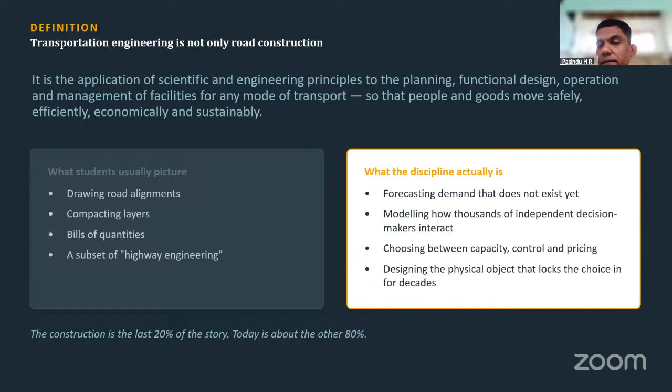A common misconception among civil engineering students is that transport engineering is confined to road construction, which is not the case. It is only a part of transport engineering. Under highway engineering, you do road construction, and that comprises a major component of the domain, but it is not the only component. That's a common misconception - when people ask what you're doing in transportation engineering, they assume it's just road construction, road building. But you'll realize it's much broader than that, covering more vast areas of disciplines.

So before we go into career paths, let's understand this transport system and how these three components interact: fixed facilities, flow entities, and control systems. The fixed facilities are the infrastructure we see - roads, junctions, bridges, footpaths, bus terminals, airports, ports - all those are fixed facilities. That's where infrastructure engineering or civil engineering input has the greatest impact on designing, constructing, and managing these fixed facilities. Then on these fixed facilities, you have flow entities, which are the moving component.

Now, for example, on a road you will see vehicles. In an airport, you will see aircrafts. On a pedestrian walkway or a footpath, you will see people. That is the moving entity, we call it the flow entity, the units that move through the fixed facilities.

The last, but perhaps the most important component is - when you have these moving components on fixed facilities, there has to be some rules, right? There has to be some control over it. Otherwise you will have a lot of issues. First of all, you have safety issues, there'll be accidents and other hazards. Also, if you don't have a rule-based system, the system will not operate in an efficient manner. That is where the signals, traffic signs, your bus schedules and timings, aircraft control systems, port navigation systems, all of those come into the picture to ensure these flow entities use the fixed facilities primarily in a safe and efficient manner.

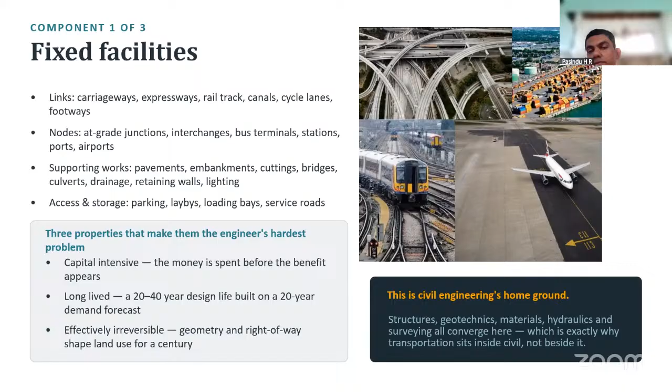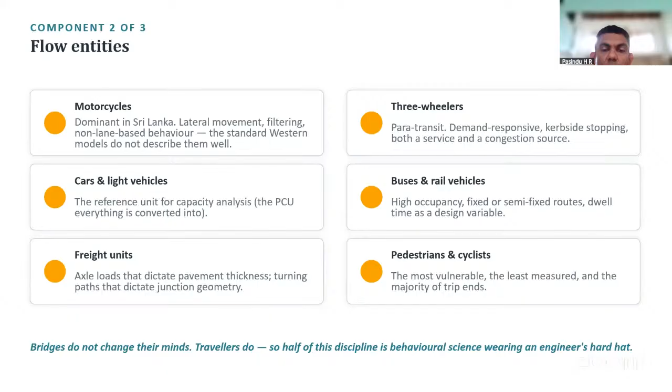Flow entities, I don't need to explain too much. All types of movement, whether it's a ship or a plane or a bicycle, you're walking, anything, your goods, freight - everything is part of this broader definition of flow entities. So you can have flow entities on guided tracks, and you can have flow entities that move freely.

Now, people inside the terminal, that's a flow entity. So if a civil engineer is designing a terminal, our primary demand is from these people movement. So we had to figure out where these people are coming, how many people, how will they concentrate, what is the speed at which they will move. How much time they need to board, how much time they need to alight, how long does it take to issue a ticket. All these are parameters that we'll take into account in designing the size of this terminal. It doesn't come - it's not this random thing that people figure out, this is the size.

And a lot of calculations go into determining this. There are standards developed by various agencies to help you do that. But a lot of the time, you go through fundamental analysis to figure out these things, because, as I mentioned, we are designing while incorporating a lot of human behavior. So it can change, and that change will affect your entire operations.

The other thing is, how do you measure flow entity movement? We talk about a rate or a flow rate. We talk about vehicles - if it's moving on a lane, we say vehicles per hour. So on a per lane basis, you can move about 1,800 vehicles per hour if things are operating well. But when the traffic breaks down, when you call it congested or gridlock condition, this vehicle flow from 1,800 per hour goes down to about 200, 300 passenger cars per hour. That's when you call it congested - we call it traffic block.

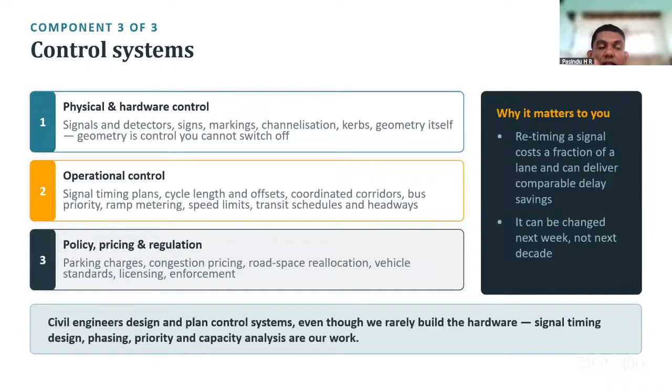Later on we'll discuss how civil engineering has a component determining this control system for various fixed facilities. So these are some examples - your traditional traffic signage, road markings.

In a railway, you have the signals. If you go to the railway station HQ, you'll see the big panel where they control all the train movements. They are managing it - the trains by themselves cannot manage the movement. So there has to be a central place where they control this - the air traffic control center.

So now we've discussed and you have a fair idea of what these three components are: fixed facilities, control systems, and flow entities. Whatever it is, you have to plan, design, build, and operate - that's the process for any engineering aspect. You plan something, you design something, and build and operate.

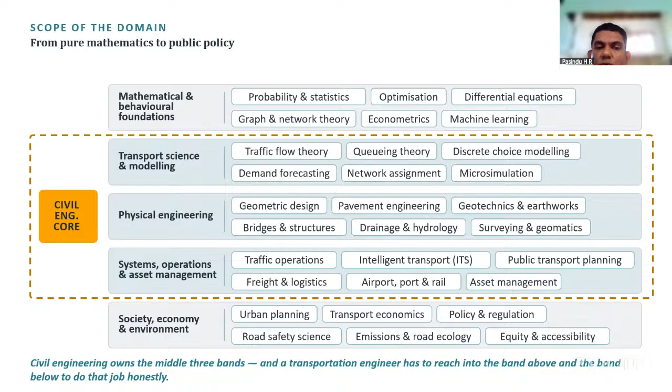Another way of looking at transportation is through its subdisciplines: planning, traffic, highway design, and pavement design, which is the soil or structural design. If you go further up, that means less involvement for civil engineering. If you go further down, that's more into the core civil domain.

In very classical universities, they won't even have transportation as a department - they'll have geotechnics or geotechnical engineering take over the pavement design component, so there's no specialized division. At least in most civil engineering programs you'll have geometric design and pavement design, but if you do electives, you'll often have planning and traffic engineering modules too.

But if you go to schools like Delft, they have a faculty of civil engineering, so within transport they cover a lot at undergraduate level, touching on social sciences, economics, and systems engineering. There's a good school in Dresden, Germany, with a massive transport engineering faculty, looking at ecology aspects as well. It all depends on the focus of the degree program - that's the main thing.

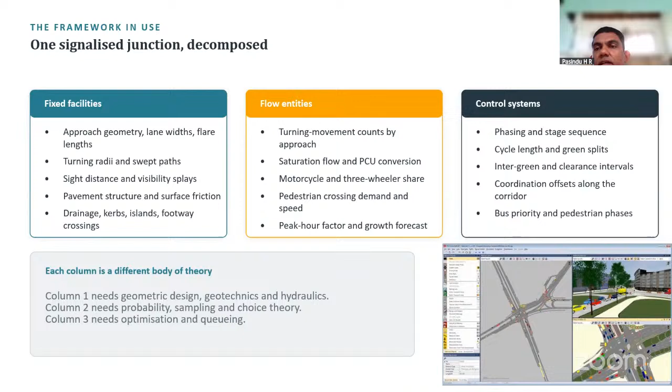If you have bus priority, you can have a separate bus lane, for example. If you remember, certain junctions in Colombo have a separate bus lane at the junction. So those are all controlling the movement of flow entities, while making sure you keep everything within the fixed facility design parameters.

So this is what I was just talking about, vehicle movement. This is a very interesting area in transportation engineering - the study of vehicle movement. It's very similar to the hydraulic pipe flow equation, where flow is estimated as the product of the area of the pipe and the velocity. It's very similar to that. Our velocity is the velocity of the vehicles, average velocity.

So traffic flow theory is rooted in this fundamental concept - a study of the movement of vehicles. From this point onwards, you can develop all kinds of complicated equations. You can do numerical modeling, develop software, and analyze it using software. But it's rooted in this fundamental concept of studying the behavior of vehicle movement and how the speed and density of the vehicle flow will change, because those are related.

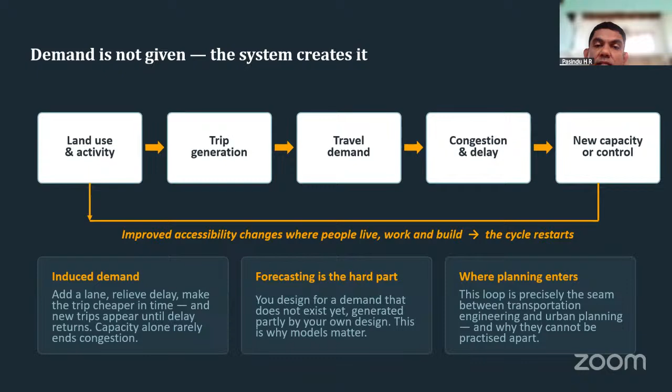Then you estimate from where to where these trips are going, and obviously they will use a particular route - that's where congestion and delay happen. That's how you have to plan, plan for new facilities. When you have delays or congested roads, you figure out whether you want to add a new road, put in traffic signals, or find some other solution. So this is another main component of transportation engineering - looking at demand, how it evolves from trip generation up to how vehicles are assigned to a particular route.

For example, when the Ratnapura Expressway was planned, you do a model for the entire study area. You find out, if we were to develop an expressway up to Ratnapura, what type of locations will it serve? Will it serve people living in Colombo, or people living further south of Colombo? Where will they try to go - will they just go to Ratnapura, or go further down towards Hambantota? All this type of modeling work can be done using transport flow analysis.

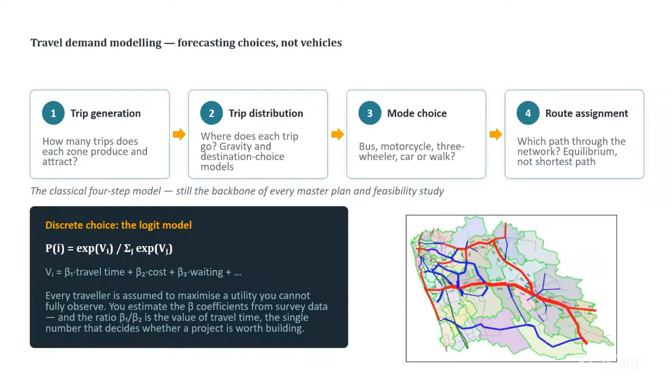So as I was continuing, you can finally end up estimating how many vehicles will be assigned to the expressway, and then you move ahead with the design stage afterwards.

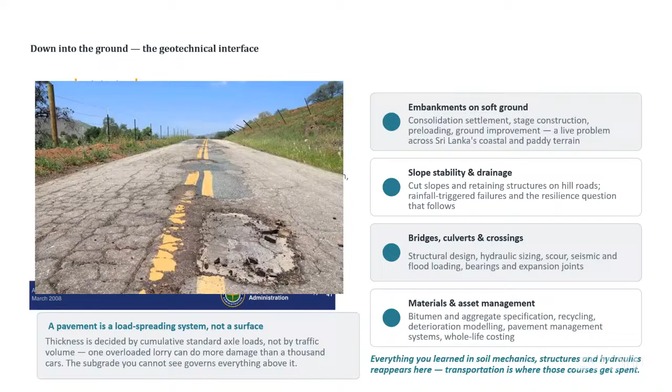So that is where the efficiency breaks down. So that's why you say we have to design a transport system in a proper manner so that it will function safely as well as efficiently.

So beyond our engineering domain, these are a few areas that transport engineers need to have some idea, some awareness, or more than that, a little bit of appreciation of the implications of that.

Road safety. A lot of our engineers have very little regard about road safety when they are designing infrastructure. So that is something they should understand: vehicle performance, what it takes for a vehicle to stop, how your infrastructure will assist that process, and the implications of that, especially the interaction between pedestrians and vehicles, who's at risk, and how do you minimize that risk.

Environment and ecology, you'll see in the news a lot of problems when you do road projects. People are protesting. Environment groups are very aggressively protesting against some of the projects. So you have to acknowledge that there's a problem, and be ready to face those as well, because ultimately it will come down to the consultants or the contractors to defend those.

Economics and appraisal, how do you justify these projects? Is it worthwhile constructing a 4-lane road? Do we need an expressway here? Should the government import these low-floor buses? So those are all economic decisions. And unfortunately, sometimes transport engineers are not that involved in that decision-making process, because we don't make ourselves aware of these components. We are just sticking to our domain, which is not enough.

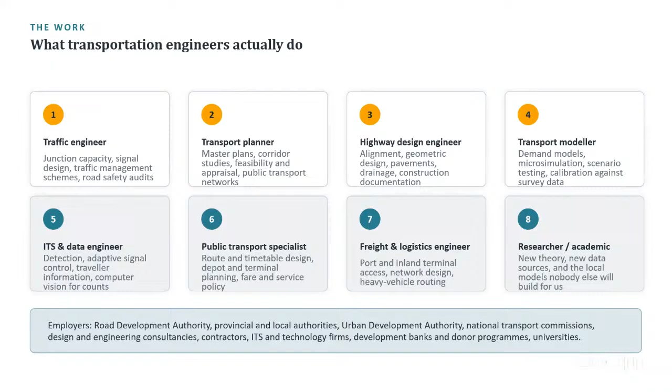So what do you need to do now? I purposely said relearn mathematics because my experience is that the way you've learned mathematics - I don't want to generalize, but the majority of you - the way you learned mathematics to enter university is not helpful for practicing as an engineer. You have to figure out a way to relearn mathematics the way it's supposed to be learned. Students struggle with the quantitative part of engineering because of this.

So relearn mathematics, because transportation has a lot to do with mathematics. Programming - be familiar with software and coding. Now things are easier with AI, but still you have to have some basic knowledge.

You have to be prepared to go to the field. You can't become a transport engineer in the office. You have to be prepared to travel around the country, go to sites, see what's happening. That's the best type of education you can get, by observation. You have to go there and look at a junction for a couple of hours - sometimes you might see a pattern.

You'll get the opportunity to travel the world because transport projects happen across the world. So if you join a good consulting company, there's a lot of opportunities to travel to many parts of the world. That's one good thing about transport - you'll be able to travel. So a lot of field work is involved.

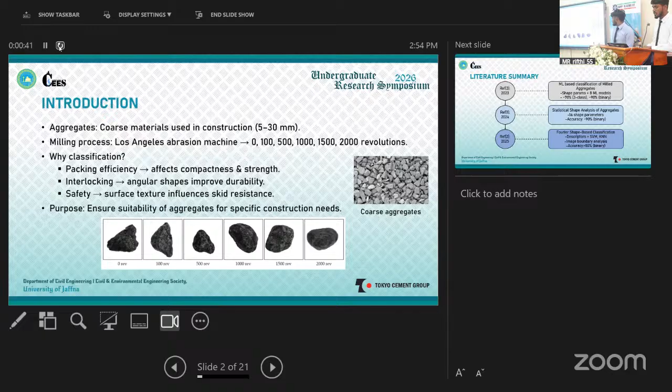Here we are using 6 classification classes: 0, 100, 500, 1000, 1500 and 2000. Those 6 classes are present in the slide.

Let's discuss the previous studies done in this classification of aggregates. Normally they have used image software to find 14 shape parameters, and used those as features for ML-based classification and statistical shape analysis. They have also used Fourier shape analysis for aggregate shape classification. They perform best at binary classification, whether it is milled or unmilled, but when it comes to multi-class classification, the accuracy is very low.

So here we aim to improve our research by increasing the accuracy of multi-class classification. So far, CNN-based classification has not been used in this particular field, so we are going to employ CNN-based classification. Normally for aggregate shape classification, handcrafted features are used, but here we are going to employ CNN-based features to classify, and we aim to deliver a lightweight custom CNN model with lesser inference time, suitable for apps working in robust environments.

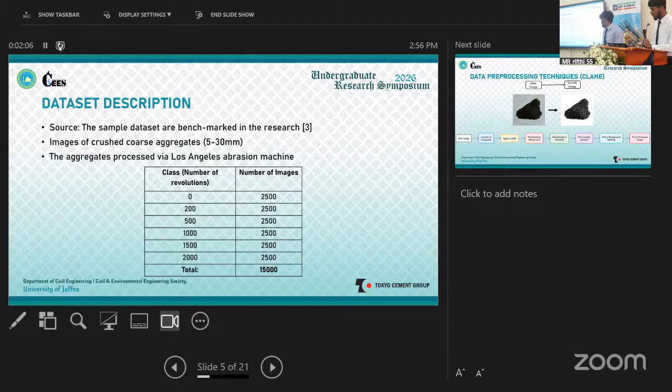We are using the dataset that was used in the previous study: totally 15,000 images, with 6 classes, 2,500 images per class. As previous studies focused on boundary analysis, here we are mainly focusing on morphological and textural features. We are employing Contrast Limited Adaptive Histogram Equalization as a pre-processing method to enhance the morphological and textural features of the raw image.

The block diagram shows how we extracted the features. After pre-processing, we split the dataset into training, validation, and testing sets, and we will train our custom model using the training dataset.

After that, on the models which are performing best, we select those models and use feature selection to extract the deep embeddings from those custom models and use those as features for the SVM based classification.

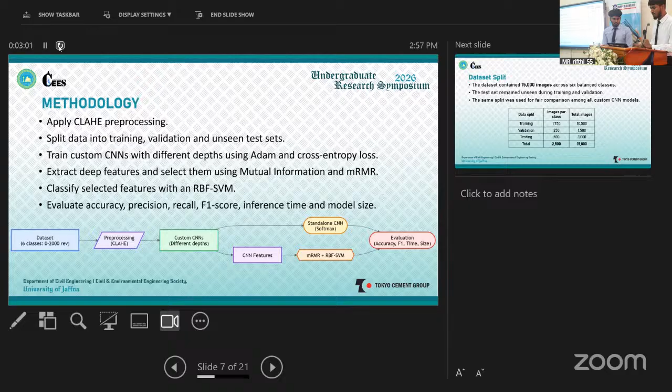The performance of our models will be evaluated based on accuracy, precision, recall, F1 score, inference time, and model size. For the dataset, we use a total of 10,500 images for training, 1,500 for validation, and 3,000 for testing.

This is the configuration we are using for the 8 custom models and the 8 hybrid custom models. For the hybrid models, we use the deep embeddings obtained from the custom models as features, and use mutual information and MRMR for feature selection, followed by SVM based classification.

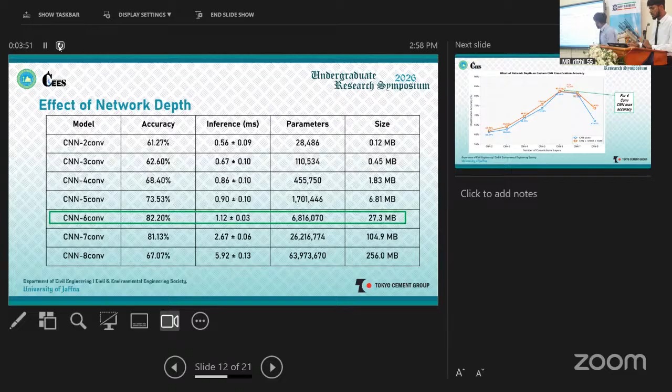Let's look at the results for the 8 convolutional custom models. Here, the model with 6 convolution layers has the highest accuracy, about 82%. You can see the image of the convolutional layers. The custom model with 6 convolution layers is the best performing.

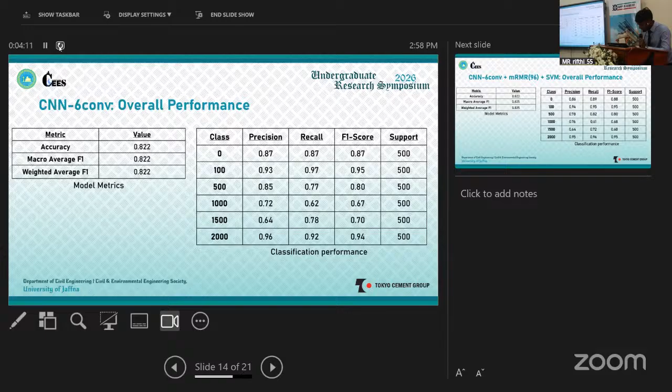Thank you, Noiska. Let's talk about the key findings and results. This is the standalone model and its accuracy, about 82.2%. The hybrid model, which uses MRMR feature selection and SVM for classification, increased the accuracy to 82.3%.

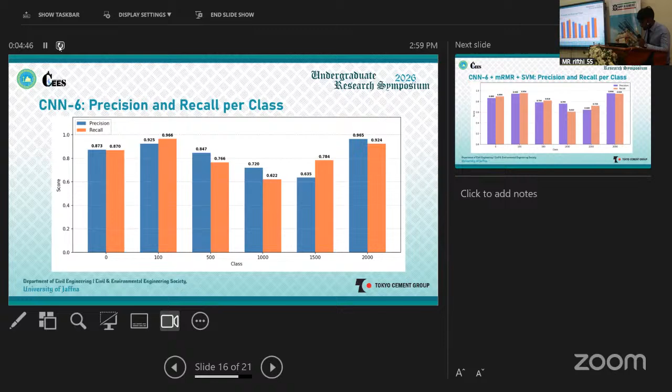This is the precision and recall for the standalone model. As you can see, the extreme classes such as 0, 100, and 2000 have really good accuracy, but the intermediate milling classes have lower accuracy. This is because of the small, subtle morphological changes during these milling classes, making it hard for the model to distinguish between them.

Let's talk about the key findings. Among the 8 convolutional models, CNN6 has the best standalone performance, and the best hybrid model also increased the accuracy. The extreme classes such as 0, 100, and 2000 are classified reliably, whereas the intermediate classes are hard to distinguish. Increasing the depth beyond 6 convolutional layers doesn't help increase accuracy or reduce inference time.

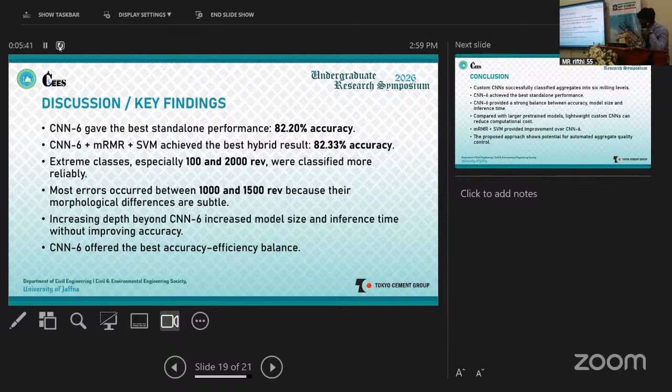In conclusion, we have successfully classified these 6 classes using a custom CNN. Compared to large pre-trained models such as ResNet50 and EfficientNet, our lightweight CNN can reduce computational cost drastically, and we can deploy it on a microcontroller as well. This MRMR and SVM hybrid approach has also improved our accuracy.

This proposed approach shows potential for automated aggregate quality control. Our future work would involve exploring further lightweight and attention-based models, and validating our system in real industrial environments. Thank you both.

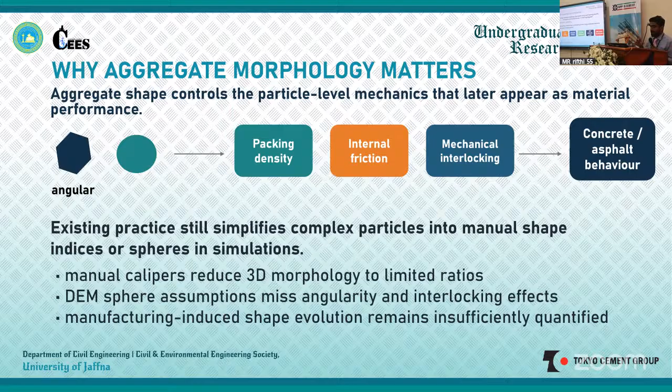The whole research is based on a question: can image-derived morphology descriptors and graph learning identify meaningful process phases in milled aggregates? To answer this, the experimental workflow was constructed as follows: we first obtained gneiss aggregate from the northern part of Sri Lanka, processed it through jaw milling, then performed silhouette imaging, extracted 14 shape descriptors, formed a KNN similarity graph, and performed GNN phase classification.

So to talk about the data set and the descriptor space. First, when we are collecting the images, we will have a white sheet where the aggregates are placed.

So to reduce projection bias, we are rearranging the aggregates 10 times and taking 10 images for a single group of aggregates. This makes the projection bias reduced. So altogether we are getting 36,000 aggregate particles, where each revolution has 3,600 particles.

So as you can see, we are considering 0 to 1,500 revolution levels, and then we will get 14 geometric shape descriptors for particles, and the aggregates are between the 5 and 18 millimeter wet-sieved particle.

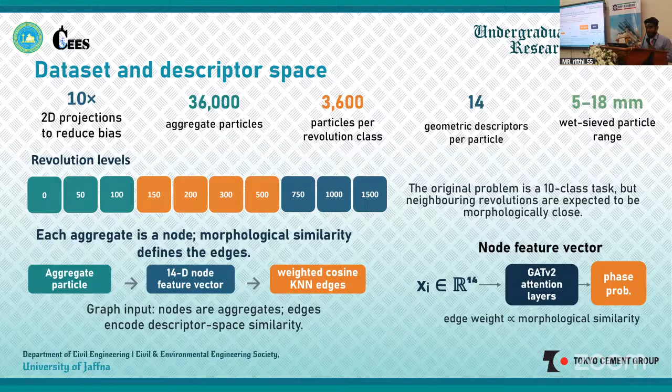So first, the initial model screening, we first approached a 10 flat class revolution classification. If you see, the random baseline is 10% and we obtained 25% with the 10 class GNN screening. This might be lower, but it's actually above the random baseline.

And then we tested many GNN architectures, and everything fell into the shown range. GATV2 was the selected one because it has consistent performance with the weighted cosine edges.

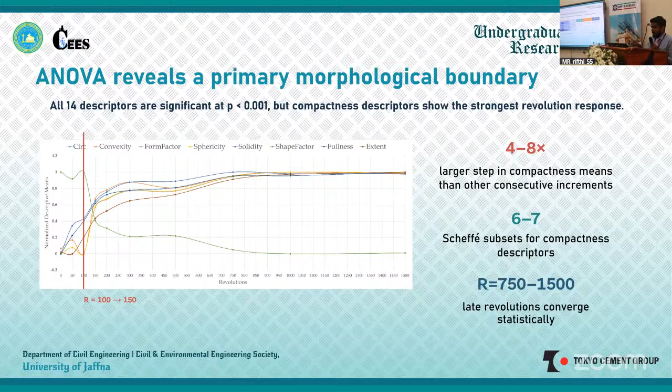We also analyzed the Scheffé subsets where we got from 6 to 7 shape subsets, geometric shape descriptors. You can see that from 750 to 1500, it constantly grouped together, which means there is another boundary.

So altogether, we identified two boundaries: a primary boundary between 100 and 150, and a secondary boundary between 500 and 750. We made a partition scheme, and S1 is the partition scheme consisting of the identified primary and secondary boundaries.

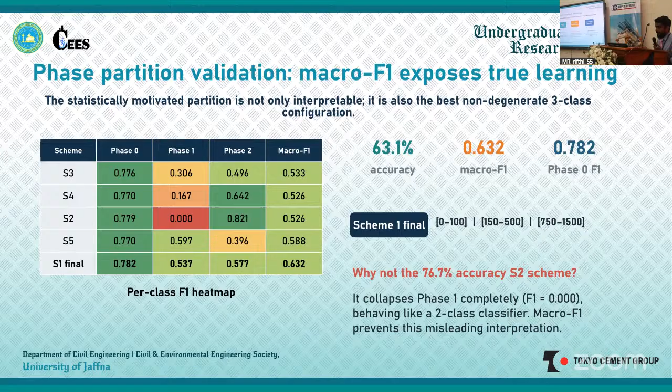So the conclusions are that two primary and secondary boundaries exist, and the statistically motivated partition is the best performing partition scheme. Future directions could approach getting 3D projections of aggregates, surface texture features, or more meaningful shape descriptors like Fourier or other methods to capture the contours.

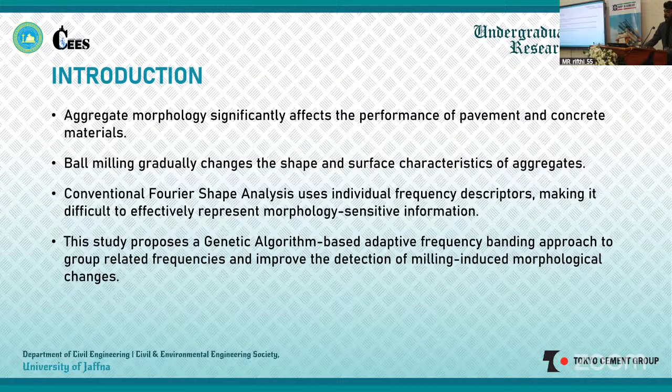To do that, we came up with an objective. The first objective is to develop a genetic algorithm-based frequency banding approach to optimize grouping of the Fourier descriptors. From that, we would like to extract features from the optimized adaptive frequency bands to effectively represent the aggregate morphology.

Using that one, we aim to evaluate the effectiveness of the proposed adaptive frequency banding for classifying different milling stages using the classification methods.

Then the 2D signal is transformed into Fourier components using the discrete Fourier transformation. This is our data getting method.

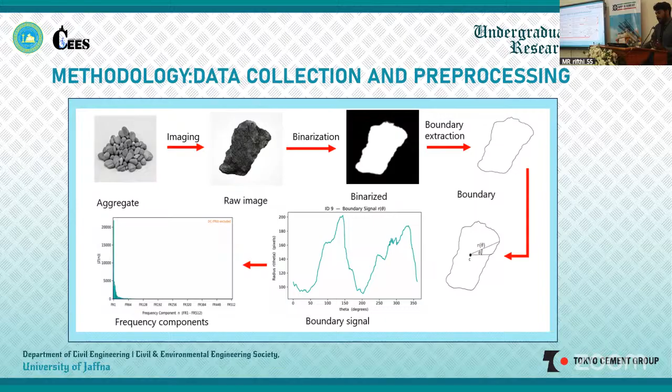We have classified using multiple methods, but here the genetic algorithm analysis is the major one. So here we have to divide it into bands.

For that, we have taken the chromosome as the four frequency ranges. We have taken every gene as the frequency boundary. Then from that boundary, we have extracted the statistical features.

Then from that we get the new genome generation. Then we have checked for the convergence of the algorithm. If converged, it ends; otherwise, it has to be processed further to get the proper and optimized frequency band.

Also, these things were done within 19 generations. So the algorithm has converged in a better way, nearly instantly.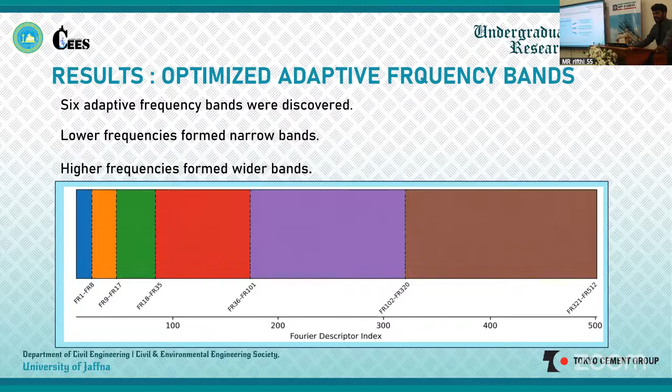So we also extracted the statistical features from the bands we found - mean, standard deviation, RMS, energy, maximum range - these standard features are extracted to give meaning to the band.

By getting this, we have reduced the feature dimensionality. Also, we have grouped the frequency bands and preserved the morphology information. This also helps us improve classification performance.

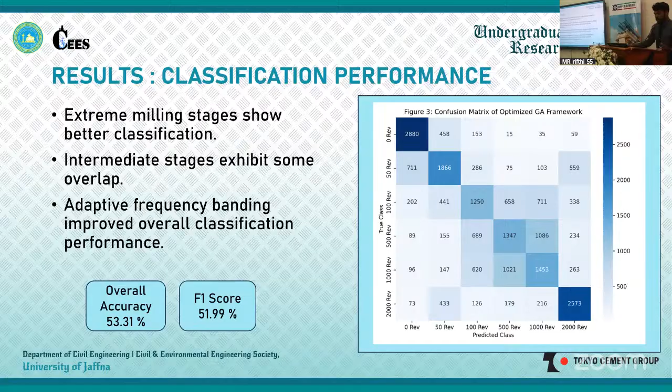From all these findings, we can come to the conclusion that the genetic algorithm successfully identified the lower band with higher indication for the Fourier descriptors effectively. This adaptive frequency banding effectively represents the shape, texture information, and roughness, providing more meaningful features for differentiation of the frequency band.

The extracted features with the accuracy of 53.31 indicate changes in the frequency corresponding to morphological changes. Using all these findings, the proposed adaptive spectral topology framework provides an effective approach to detecting milling-induced morphological changes in aggregates. Thank you.

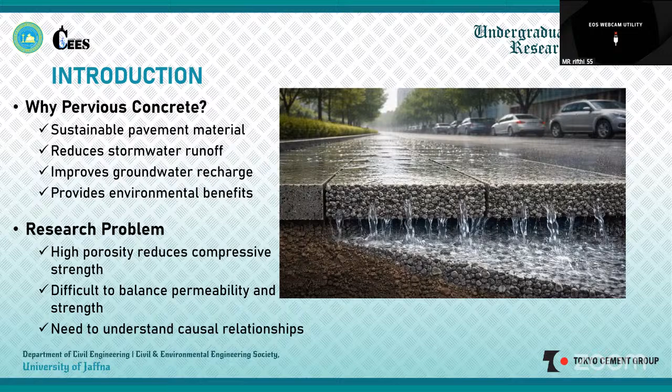The objectives of my research are to investigate the influence of aggregate size on compressive strength and porosity, to study the effect of compaction, to develop a weighted standardized causal path modeling, to identify the optimum aggregate size and compaction that provide the best balance between compressive strength and porosity, and finally, to quantify the direct, indirect, and total effects.

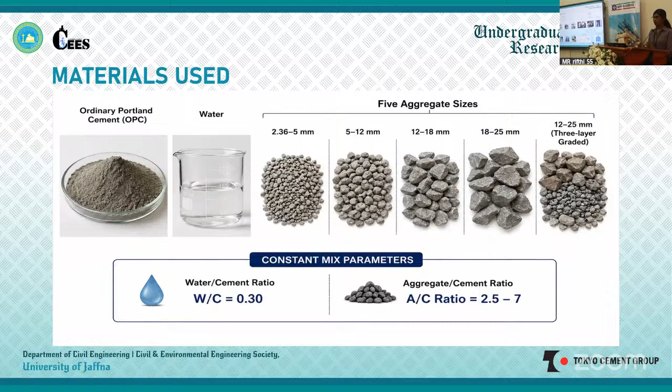Moving on to the methodology, it consists of 2 phases. In the first phase, all materials were thoroughly mixed to obtain a uniform mixture. Then the mixture was placed into 150 millimeter cube molds.

After that, compaction was carried out using the standard Proctor hammer with different compaction levels from 0 to 60 blows. After that, the surface was carefully finished. Then the specimens were cured for 28 days, and were ready for experimental testing.

Here, the wet density, measured porosity, and compressive strength were found. Finally, the experimental data were analyzed using the weighted standardized causal path modeling to evaluate the relationship among the variables.

This model consists of 3 categories of variables. The input variables are the aggregate-cement ratio and compaction. The mediator variables are the wet density and measured porosity. And the output variable is the compressive strength.

Unlike ordinary correlation analysis, it helps to quantify the direct, indirect, and total effects.

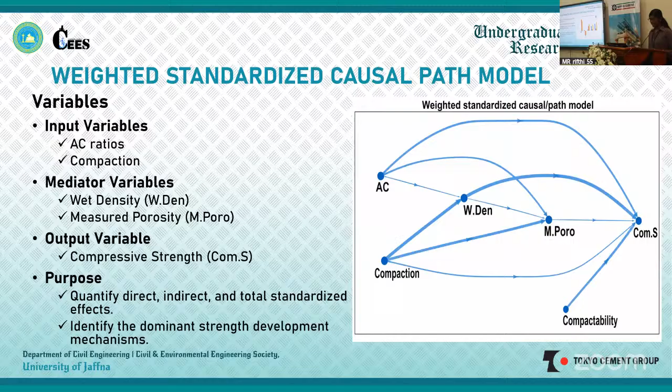The results indicate that A05, ranging from 2.36 to 5 millimeters, exhibits the higher positive total effect. Also, A03 and A04 showed positive contributions, but A02 produced a negative total effect due to unstable, poor connectivity.

These findings indicate that smaller aggregate size improves the packing density and internal stress transfer, resulting in better mechanical performance.

The causal analysis shows a different influence for each variable. The aggregate-cement ratio produces negative effects. In contrast, compaction produces positive effects. So controlled compaction significantly improves the compressive strength by enhancing the wet density and reducing excessive porosity.

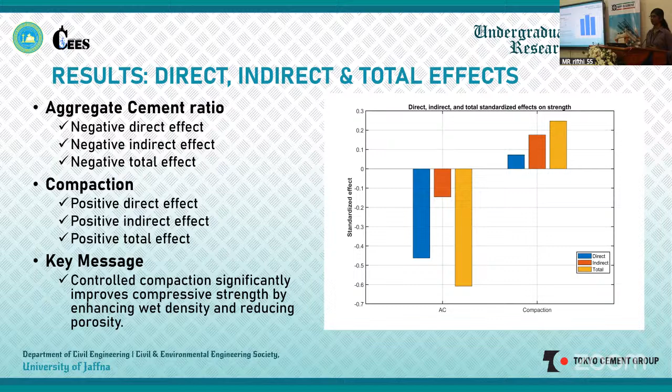The weighted standardized causal path model showed a strong explanatory capability. The adjusted R-squared values ranged approximately from 0.7 to 0.9. These high values indicate that the model effectively captured the relationships among the experimental variables.

Overall, the study demonstrated that aggregate size significantly influenced the pore structure formation. Smaller aggregates improve the packing density and compressive strength. Controlled compaction enhanced the wet density and decreased excessive porosity.

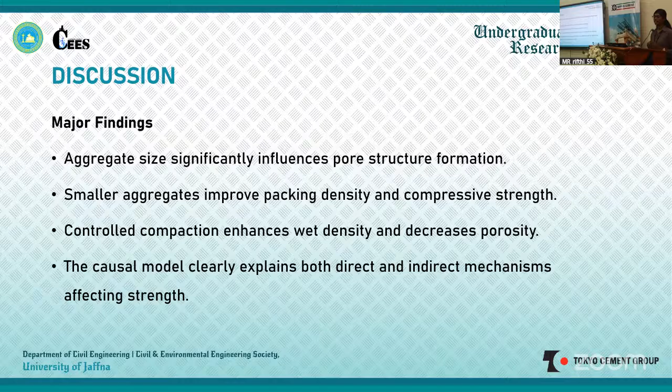In conclusion, aggregate size and compaction significantly affect the performance of pervious concrete. Wet density and measured porosity are the key mediating variables. Here, A05 demonstrated the best overall value. And finally, the weighted standardized causal path model is an effective tool for optimizing sustainable pervious concrete mix design.

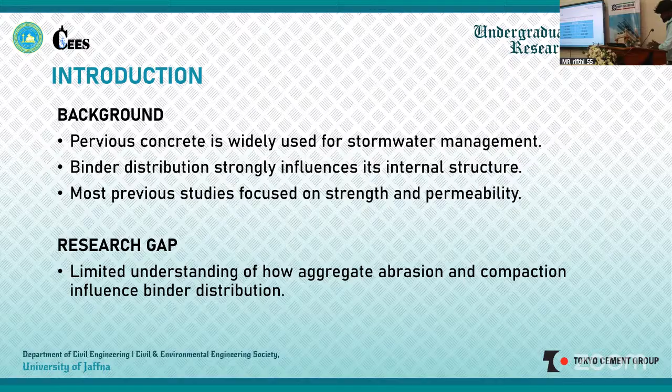The main objective of the study was to investigate the binder distribution in pervious concrete using image analysis. 3 aggregate to cement ratios, 3 aggregate abrasion levels, and 3 compaction levels were used. For each combination, we get 2 samples, so totally 54 specimens were prepared for the study.

First, aggregates were subjected to 3 different abrasion levels: 0, 200, and 1000 revolutions. After abrasion, the aggregates were wet sieved to obtain the required size range of 12 to 25 millimeters, and then air dried. Next, pervious concrete specimens were prepared using 3 aggregate to cement ratios of 3, 4, and 5. A water to cement ratio of 0.3 was maintained to achieve a zero slump concrete mixture.

Then the specimens were compacted using 3 compaction levels: 0, 30, and 60 blows. In total, 54 concrete specimens were prepared and cured in water for 28 days. After curing, the core samples were extracted from each concrete specimen.

To improve the image quality, matte varnish was applied to seal the small surface pores on the aggregates. Then white pore filling material was applied to the visible surface pores. Finally, panoramic images of all core samples were captured for image analysis.

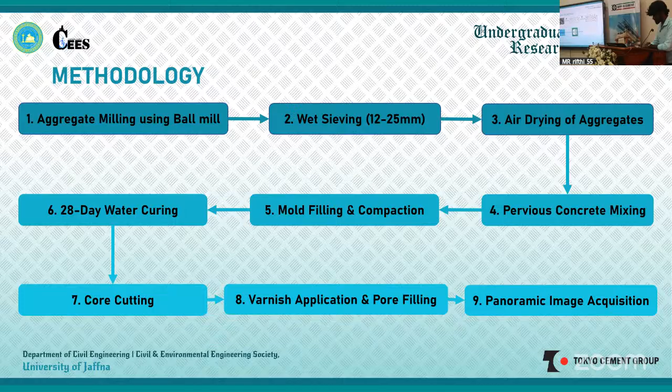The panoramic images were processed using a Python-based image analysis program. First, each panoramic image was converted into a binary image, where the black region represents the binder and white represents the aggregate and pores. Next, the binary image was divided into 10 equal horizontal layers from the top layer to the bottom layer.

Then the binder fraction was calculated separately for each layer. The Python program automatically generated an Excel file containing the binder fraction values for all 10 layers of the specimen. Finally, these data were used to evaluate how aggregate abrasion and compaction influence the depth-wise binder distribution in pervious concrete.

This is because the aggregate abrasion makes the particles more rounded. The rounded particles improve particle packing and allow the binder to spread more evenly throughout the specimen. Therefore, aggregate abrasion mainly affects the spatial distribution of the binder rather than the overall binder fraction.

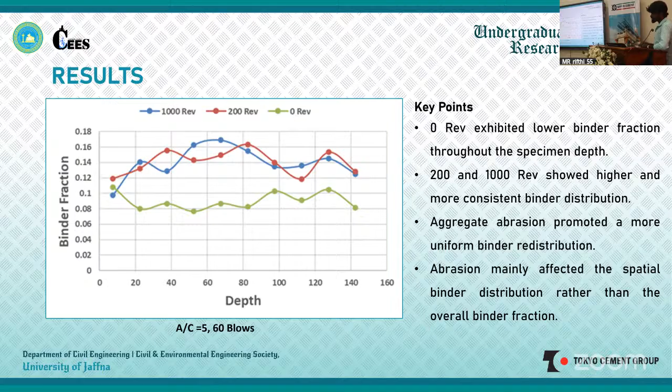In conclusion, this study successfully investigated the binder distribution in pervious concrete using a Python-based image analysis method. The results showed that aggregate abrasion improved the uniformity of binder distribution, while compaction produced a more stable binder distribution than specimens without compaction. The layer-wise analysis also showed that binder distribution is not uniform throughout the specimen depth.

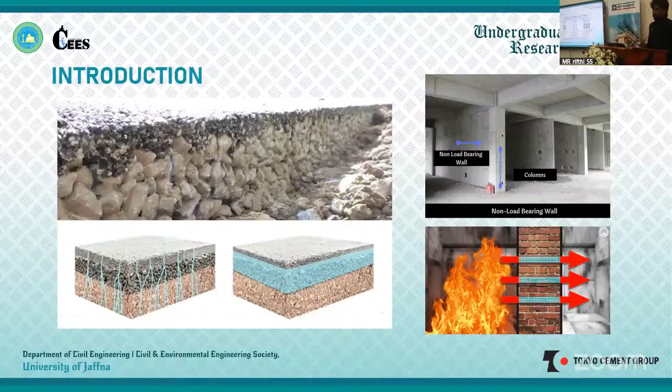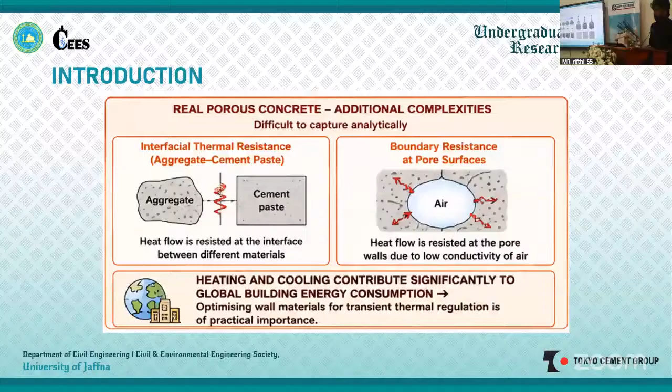Several models have been used to evaluate the heat conduction properties of porous materials, but they have some limitations, like assuming ideal pore structure or ignoring thermal boundary resistance. So this study mainly focuses on how the A/C ratio and compaction influence the heat transfer ability of porous concrete. There are also previous studies that used contour plots to analyze these parameters.

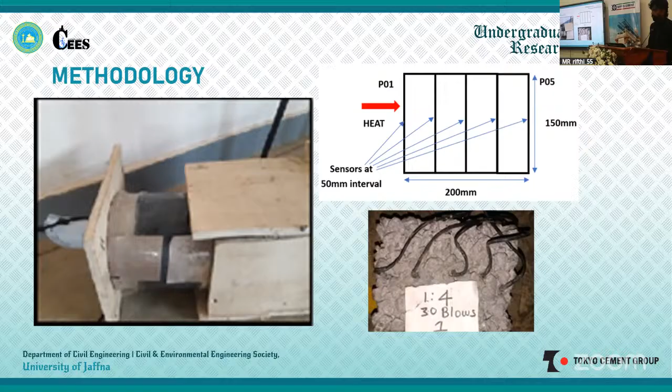As per the image, five sensors were embedded into the concrete specimen at 50 millimeter intervals. The sensors were named P1 to P5. Four A/C ratios were considered: 2.5, 3, 4, and 5. Three types of compaction were given: 0, 30, and 75 blows. The heat is applied near the P1 sensor, and all sensor readings were recorded using an Arduino based DAQ system.

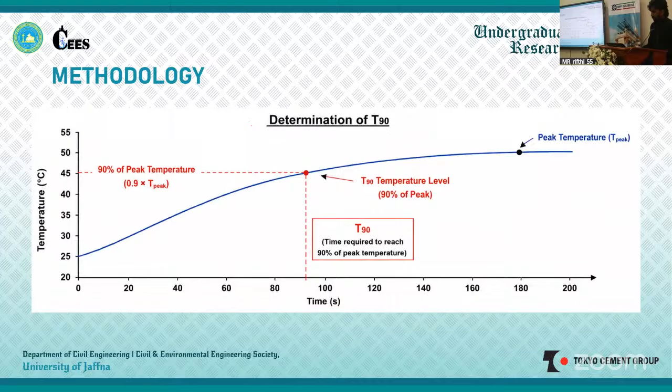Using the recorded data, we calculated the T90 and delay parameters. T90 means, for a sensor, the time taken to attain 90 percent of the maximum temperature, and delay means the time taken for heat to travel from one point to another point. It is calculated using the difference between the T90 values.

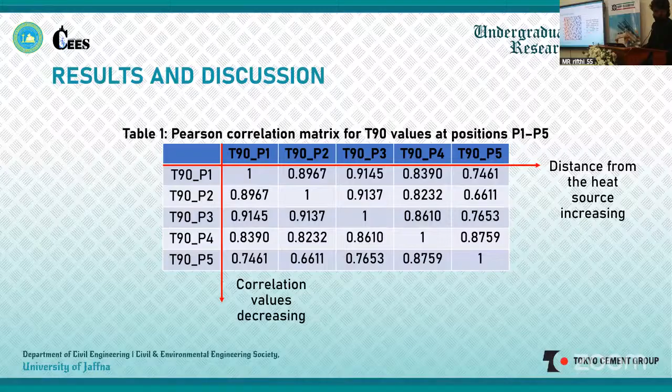Now we move to the results and discussion part. This is the correlation matrix of T90 values for positions P1 to P5. The maximum values were obtained between T90 P1 and T90 P3, and the minimum values were obtained between T90 P2 and T90 P5. We can clearly see a trend from T90 P1, the heat given site: when the distance from the heat source increases, the correlation values decrease from 0.8967 to 0.7461. This clearly indicates that when the thickness of the wall increases, the inside temperature is mostly influenced by the internal pore structure rather than the external heat source.

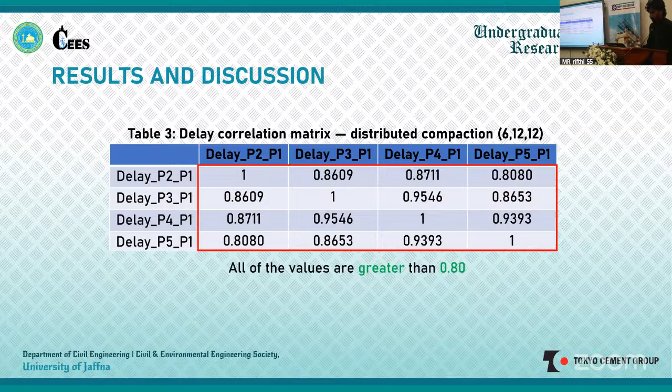In contrast, distributed compaction reduces the pore size and makes the pore distribution more uniform. This creates more continuous heat paths, resulting in strong delay correlation, as observed in the correlation matrix. Therefore, heat transfer becomes faster and more uniform throughout the specimen.

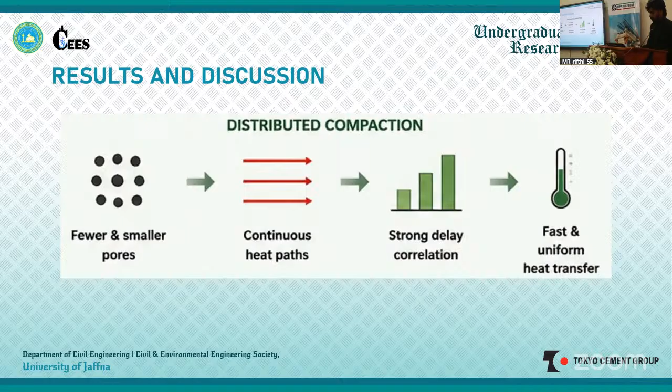To conclude, this study found two important observations. First, as wall thickness increases, the internal temperature response became more dependent on the internal pore structure than the external heat source. Second, higher and well-distributed compaction reduces pore size, improves thermal connectivity, and produces more predictable heat transfer with strong delay correlation. Thank you.

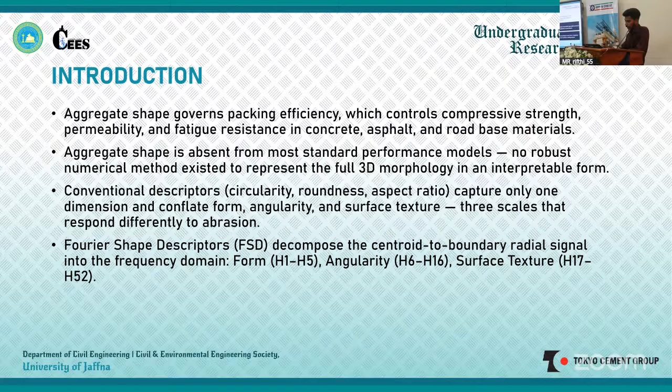For this research, gneiss aggregates from North Central Sri Lanka were selected, with sizes 5 to 25 millimeters. The particles were washed and sieved 5 to 18 millimeters and photographed using a camera under controlled conditions.

The particle boundaries were converted into 512 Fourier components using a discrete Fourier transform. Two datasets were prepared.

The first is direct milling, where separate fresh batches were milled independently to each revolution level. The second is progressive milling, where the same aggregate was milled continuously from 0 to 500 revolutions.

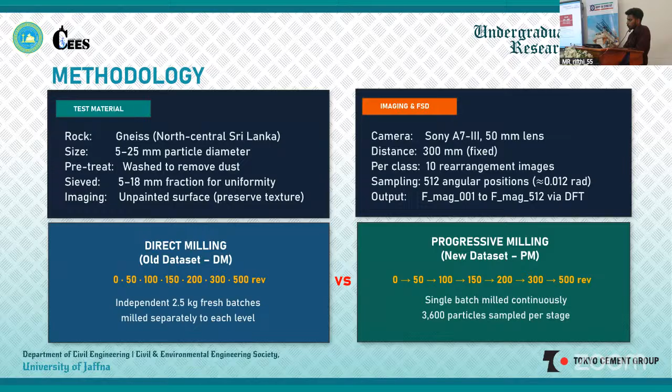First, the ANOVA result: all Fourier components changed significantly throughout the milling process. The texture zone recorded the highest F values, indicating that surface roughness is the most sensitive characteristic affected by abrasion.

The Tukey HSD also showed that adjacent milling stages, such as 50 to 100 revolutions, were often not significantly different. This indicates that morphological evolution occurs through gradual stages rather than changes at a constant rate. Let's move to the F value separability.

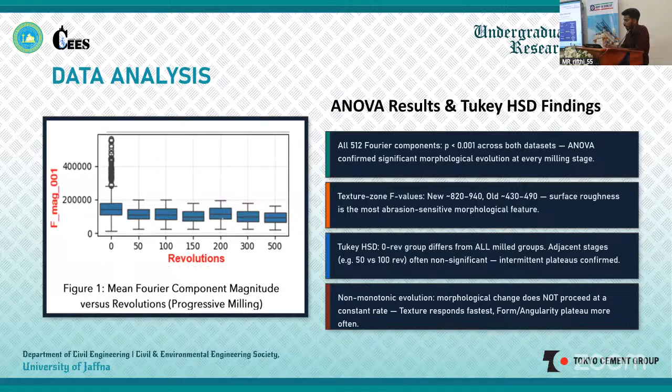Moving to the PCA analysis: 60.76% of the total variance is explained. Although statistical tests showed significant differences between the datasets, the PCA clusters largely overlap.

This suggests both methods follow a similar overall evolution pattern, but milling history still influences the details of morphology. The LDA accuracy of 53.7% indicates only moderate separation between the two datasets.

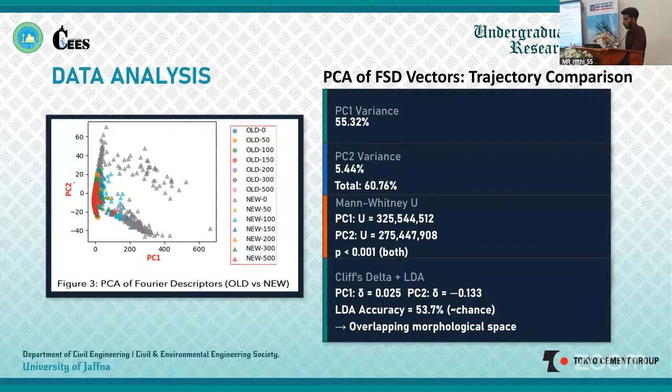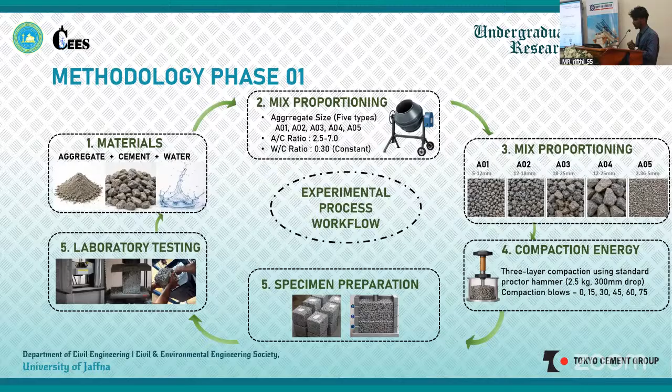Next, the ML data, we used machine learning models. Firstly, data is cleaned and organized into input output variables. Then we divide into three variables: design only, meaning only the mixed design parameters, aggregate size, and compaction energies; and interim, only the measured properties, porosity and bed densities. Both are mixed to calculate design plus interim.

Then we used 9 machine learning models, and compared them using model evaluations to select the best model: R squared, RMSE, MAE, and MAPE.

This shows the effect of aggregate size on compressive strength, and how aggregate size impacts compressive strength. Smaller aggregate sizes have higher strength because the particles are packed together, and larger aggregates create more voids, so concrete has a lower compressive strength.

Also, increasing the compaction blows generally increases the compressive strength.

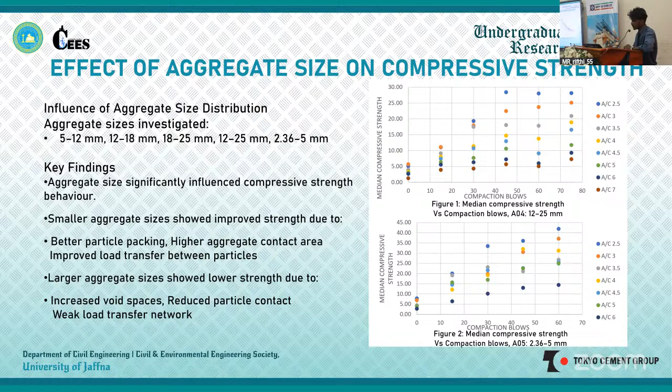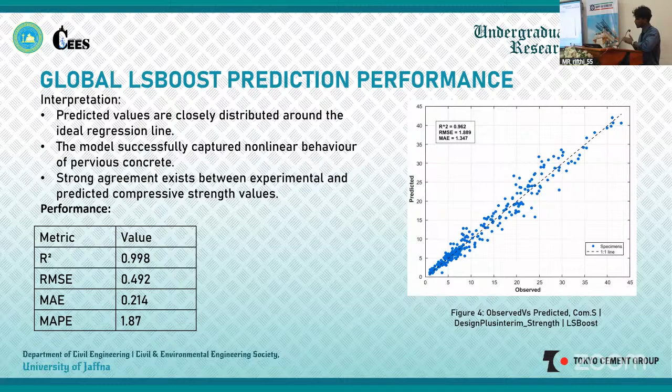Finally, the conclusion part. Aggregate size is an important factor affecting both porosity and compressive strength. Small aggregates increase strength, while large aggregates increase permeability. So higher compaction improves strength, but too much compaction may reduce pore connectivity.

Finally, among all the machine learning models, the design plus interim strength configuration with the LS boost model gave the best prediction performance. These are the references. That concludes my slides, thank you.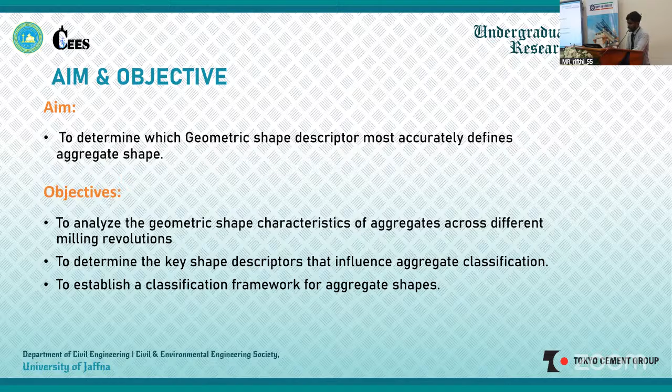So the aim of this study is to determine which geometric shape descriptor most accurately defines aggregate shape. To achieve this, we have three objectives: to analyze the geometric shape characteristics of aggregates across different milling revolutions, to determine the key shape descriptors that influence aggregate classification, and to establish a classification framework for aggregate shapes.

Next, moving to the methodology, which has four major parts. First is controlled milling, using the Los Angeles abrasion machine, aggregates milled at 0, 50, 100, 150, 200, 300, and 500 revolutions. After this process, then image processing. For image processing, we use a Sony Alpha 7 III camera.